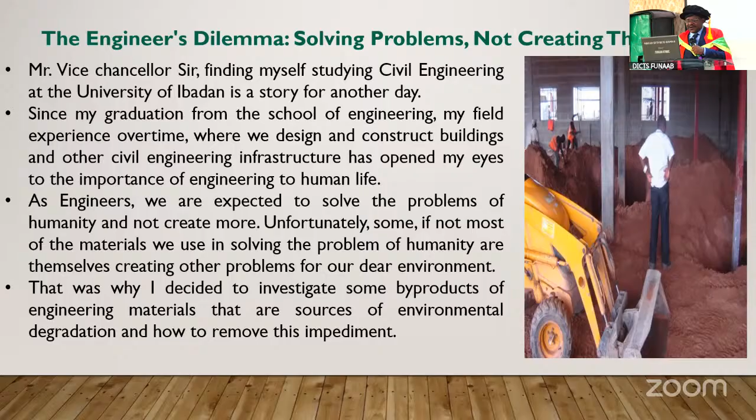Many engineering materials are used in everyday life, such as cement, concrete, crushed stones, gravels, asphalt, steel from iron ore, timbers or woods, hydrocarbon byproducts like plastic, polyethylene terephthalate—the popular PETs—tire rubbers, and many others are daily used in the construction industry. Most of these materials are obtained in their natural state but are later converted for use in engineering infrastructure. The process of conversion or production of these materials has been a source of concern, because some of these production processes have contributed to global warming.

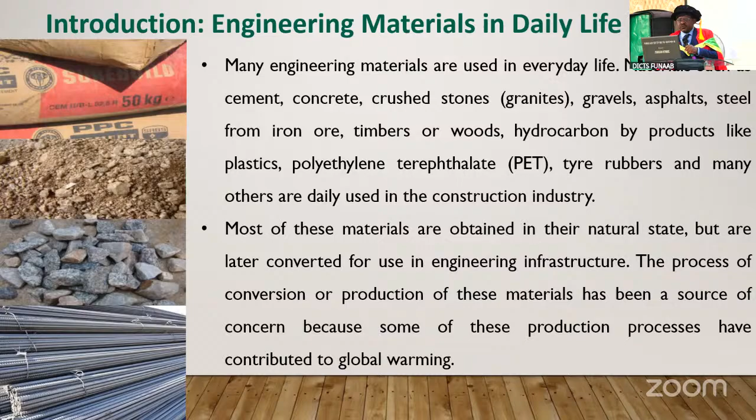The federal government of Nigeria in 2024 started construction of a super coastal highway from Lagos to Calabar, a distance of over 700 kilometers. The interesting aspect of this road project is the use of cement-based reinforced concrete as the pavement for the highway and other infrastructure. The implication of this is that over 70,000 metric tons of concrete will be used for this project.

The concern expressed by experts like Komolafe 2025 on the use of cement-based concrete is its negative impact on the environment. About 33 billion metric tons of concrete are produced annually, according to Uchechukwu 2022, while over 4.4 billion metric tons of cement is produced every year worldwide, according to Shahmansouri 2020. Greenhouse gas emission from cement production, the firing of clinker, accounts for between 5 to 8% of global carbon dioxide emissions, according to Ahmad 2021.

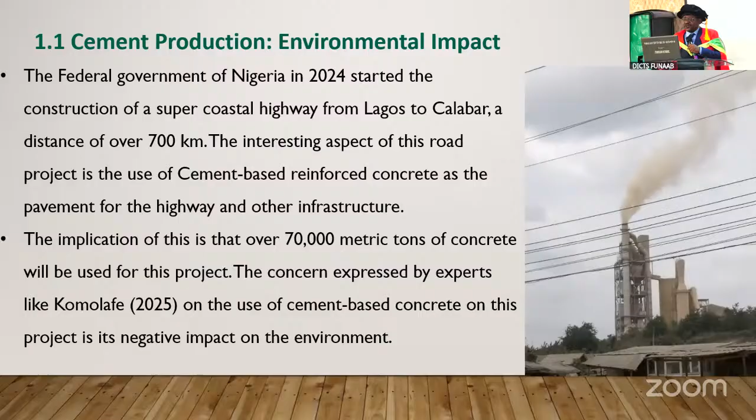In the kiln, clay is fired with limestone at a very high temperature to form a clinker, which is later ground into powder. The limestone equation CaCO3, when fired, gives us calcium oxide, which is used for cement, and carbon dioxide is released to the atmosphere. This has contributed to the depletion of the ozone layer and the current climate change experienced all over the world.

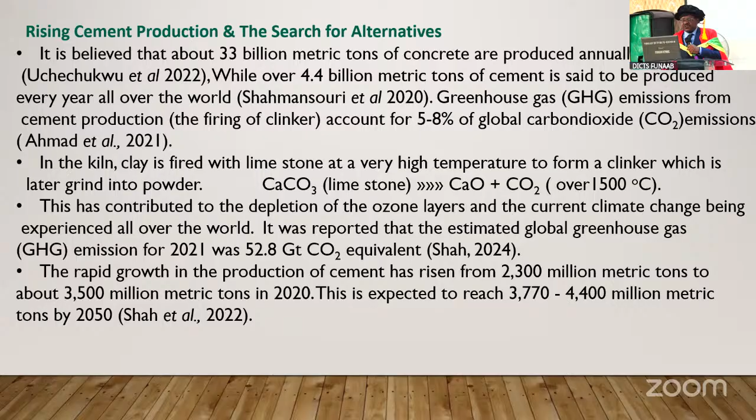It was reported that the estimated global greenhouse gas emission for 2021 was 52.8 gigatons of carbon dioxide equivalent. The rapid growth in cement production has risen from 2,300 million metric tons to about 3,500 million metric tons in 2020. This is expected to reach 3,770 to 4,400 million metric tons by 2050, according to Shah 2022.

What is concrete? Concrete is an amorphous material made of cement, fine aggregates, coarse aggregates, mixed with water. It is the most used engineering material after water. In 6,500 BC, the Assyrians and Babylonians used clay and asphalt as binders because there was no cement.

In 2,500 BC, the Egyptians used lime and gypsum cement for the construction of the pyramids. In AD 1756, John Smeaton created the first modern concrete, the hydraulic cement. In AD 1824, Joseph Aspdin invented the Portland cement that we are using presently. And in AD 1849, Joseph Monier invented reinforced concrete.

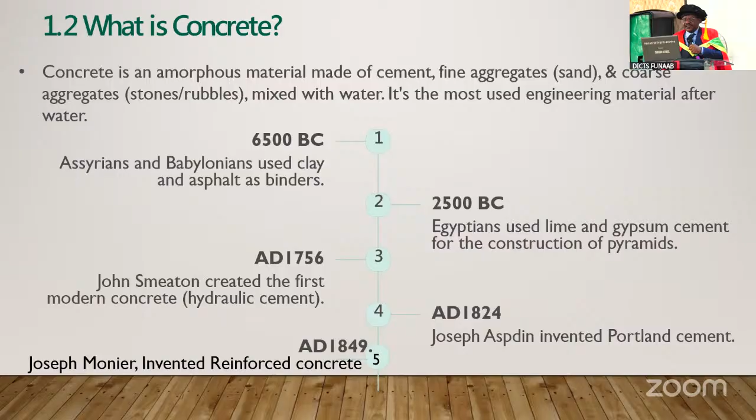Geopolymer concrete technology involves the use of natural materials that contain aluminosilicate, like calcined kaolin or metakaolin, industrial waste such as fly ash, organic minerals, and blast furnace slag. These materials are mixed in an alkaline environment, such as the oxide of sodium or calcium, mixed with sodium or calcium trisilicate in a certain proportion and molarity.

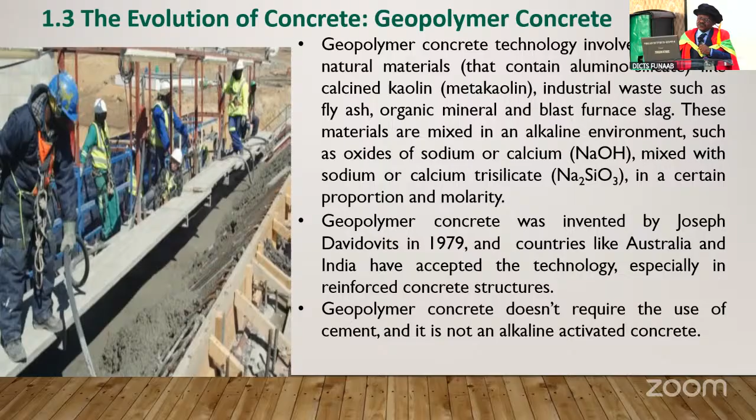Geopolymer concrete was invented by Joseph Davidovits in 1979, and countries like Australia and India have accepted the technology, especially in reinforced concrete. Geopolymer concrete does not require the use of cement, and it is not an alkaline activated concrete. The search for sustainable solutions has led to extensive research into alternative materials for concrete.

We have non-biodegradable materials wasting around, materials like plastic PET, rubber waste, and polyethylene for construction. Also, supplementary materials like metakaolin, ground granulated blast furnace slag, fly ash, corncob ash, etc. are being studied as cement replacement. Implementing the use of these will help us mitigate the depletion of the ozone layer and reduce landfill waste.

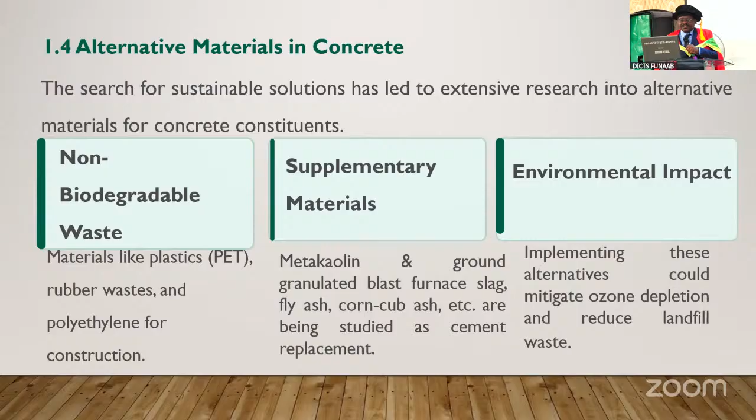My research contribution. Mr. Vice Chancellor, sir, I wish to state that I have done a lot of work on the use of discarded materials in the production of eco-friendly concrete. My exploration of this route was as a result of my observation as an industry-based engineer who later transitioned into the academic field. My research journey began from observing the indiscriminate disposal of non-biodegradable wastes and the environmental impact of cement production. This led to exploring eco-friendly concrete alternatives.

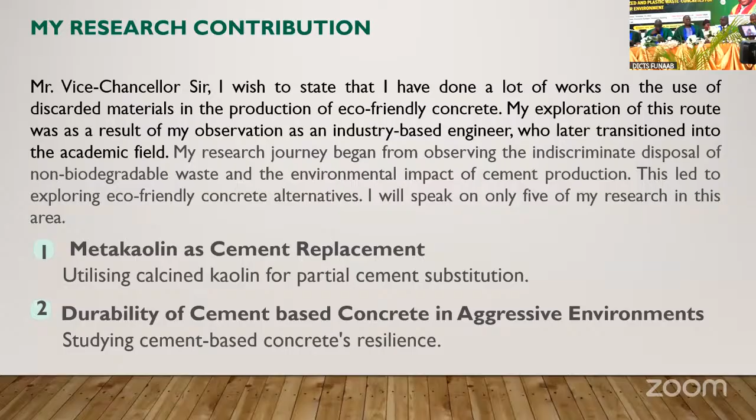I will speak on only 5 of my research works in this area: metakaolin as cement replacement, the durability of cement-based concrete in aggressive environments, geopolymer concrete, rubber crumbs and plastic waste in concrete, and plastic and glass waste in bricks.

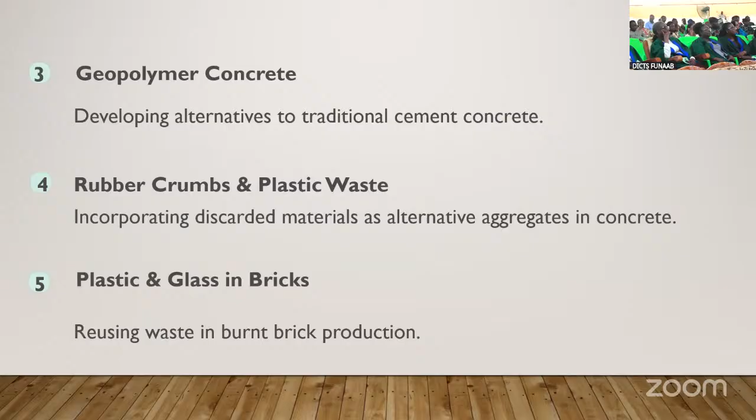For the metakaolin, Akinyele et al. 2017 A and B used calcined kaolin as a partial replacement of cement in concrete. Metakaolin, a highly reactive aluminosilicate pozzolan, offers a promising partial replacement for cement. It combines with slaked lime to form compounds similar to hydrated Portland cement.

Nigeria boasts an estimated 3 billion metric tons of kaolin deposits across various states, presenting a sustainable and expanding market for its application in construction. Kaolin is found in commercial quantities in Nigeria with deposits in Ogun, Edo, Plateau, Nasarawa, Katsina, Ekiti, Kogi, Abia, Kano, Niger, Bauchi, Sokoto, Kaduna, Oyo, Delta, and Borno states.

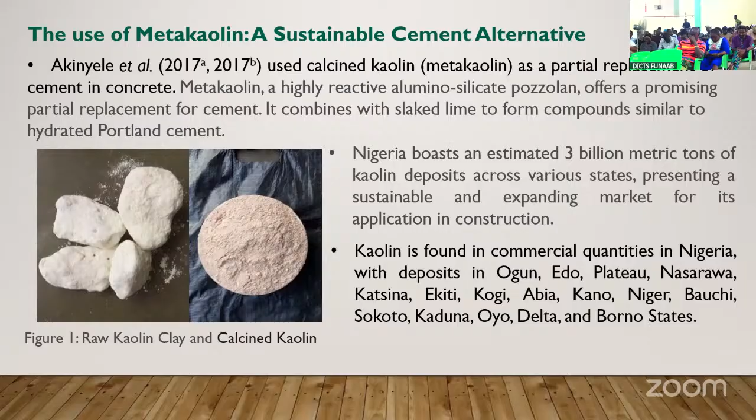The chemical composition of metakaolin, from table 1 above, shows metakaolin having silicon oxide, aluminium oxide, calcium oxide, and ferrous oxide. These are the main components in our cement that make it cementitious. Our research involved calcining kaolin clay to 700 degrees Celsius and replacing cement with metakaolin at various percentages.

The replacement percentages were 0, 5, 10, 15, 20, 25, 30, and 35% at a 0.5 water cement ratio. For a material to be pozzolanic or cementitious, it must contain 70% combination of silicon oxide, aluminium oxide, and ferrous oxide, according to ASTM C618. From the table, we can see that our kaolin and metakaolin met this demand. Our cement also shows this compound: 63.61% calcium oxide, aluminium oxide 5.64%, and silicon oxide 21.55%.

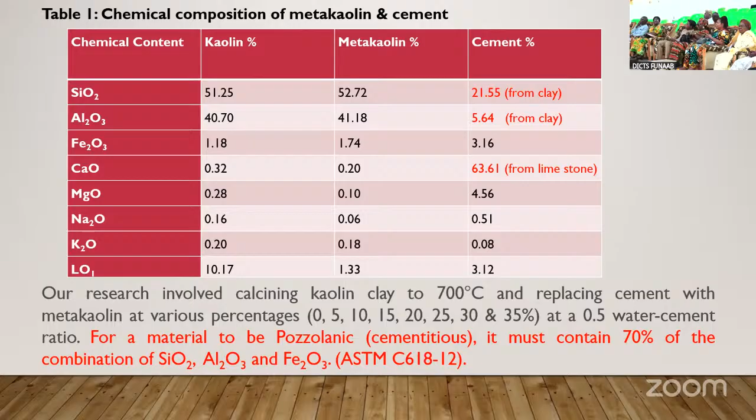The mechanical test, compressive and flexural test, reveal that concrete strength peaked at 20% metakaolin replacement, outperforming the control samples. However, the strength decreased beyond this value. Metakaolin can replace cement at between 20 and 35%.

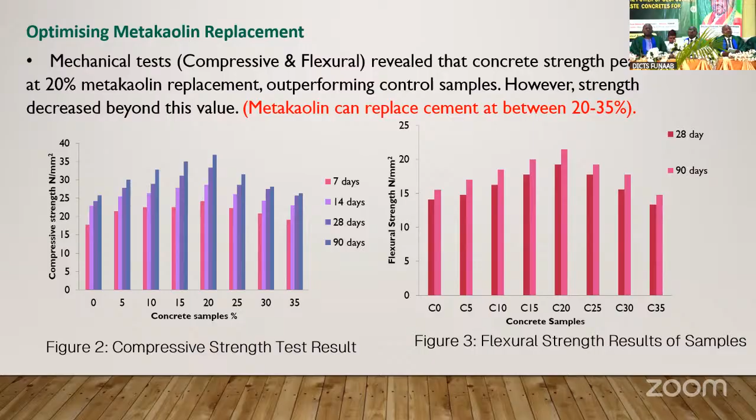Durability challenge of cement-based concrete in aggressive environments. Mr. Vice Chancellor, sir, the effect of sulfate and chloride ions on the rate of deterioration of concrete in marine environment was investigated by Akinyele et al. 2018, 2021, and 2024, and Igba and Akinyele et al. 2019, 2021, and 2022. The ingress of sulfates and chloride salt into reinforced concrete structures has led to the continuous deterioration of bridge structures and some of the concrete jetties on the Lagos Lagoon.

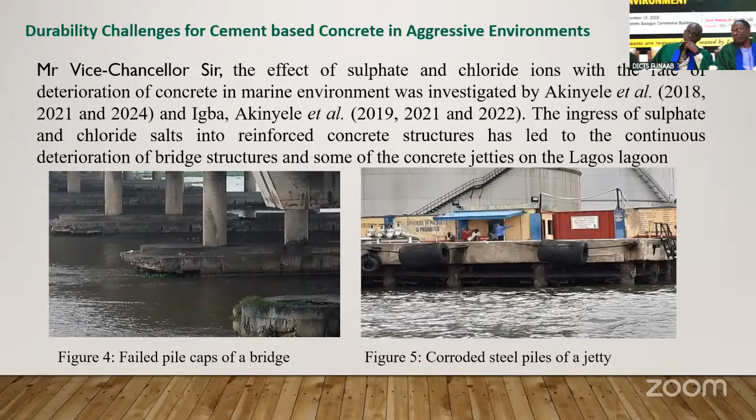Figure 4 shows the failed pile caps of some of the bridges in Lagos. When you go there, you see it. Also, corroded steel piles of some jetties. This is as a result of the effect of chloride and sulfate in the sea water.

To predict the deterioration, this research involves submerging concrete cube and beam samples in lagoon water for a period of 1 year, conducting strength tests, and using ANSYS software to simulate beam reaction to loading. The mathematical model in equation 1 for the prediction of the strength of concrete was used to determine the strength of concrete submerged in lagoon water and fresh water over a period of time. This model equation was developed by ACI 209-92. The results.

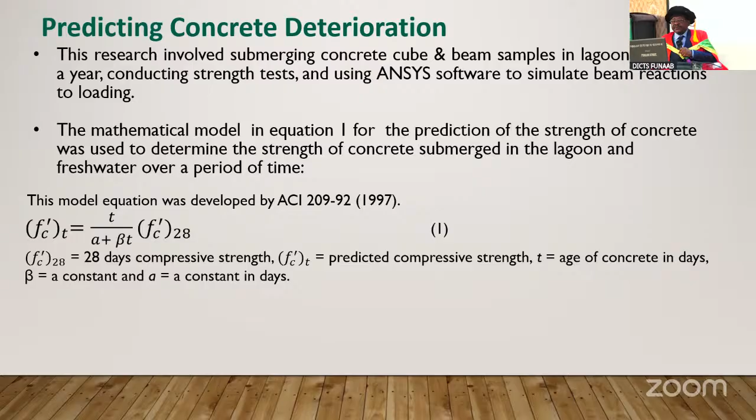The grade 30 and grade 40 concrete samples were cured in lagoon water and fresh water. The ones cured in lagoon water were tagged BL30 and BL40, while the ones cured in fresh water were tagged BF30 and BF40 respectively.

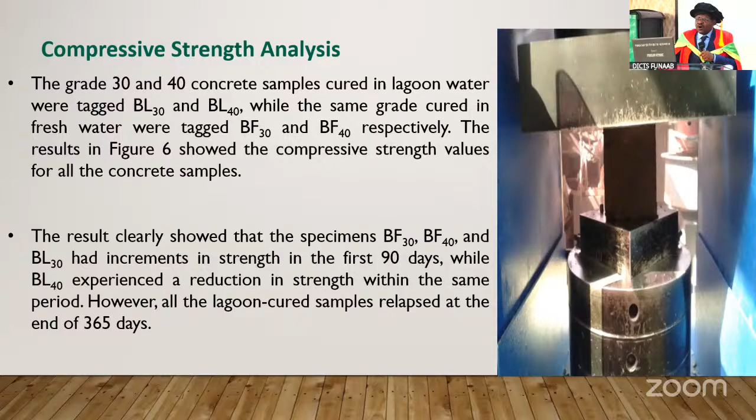Deterioration rate: the compressive strength results revealed that the deterioration rate within 1 year for BL30 was 0.057, while that of BL40 was 0.044. This indicated that the grade 30 concrete cured in the lagoon water showed a sign of higher deterioration when compared to the grade 40 concrete. This is because of the concentration of cement in it.

This result was used to predict the long-term strength of the concrete cured in lagoon water if the deterioration rate remained constant over the years under consideration, using equation 1. We can see some deteriorated samples of the concrete that we cured in the lagoon. You can see how dirty it is, carrying so many organisms on it.

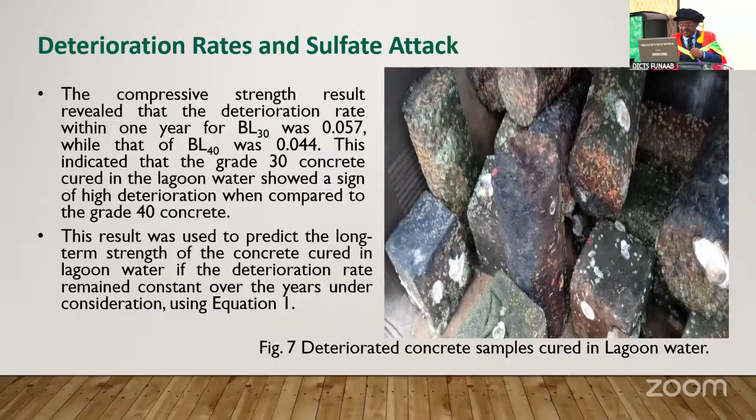Using equation 1, we were able to predict the strength of concrete after 10 years. For the grade 30, the strength reduced to 24.10 MPa, while for the grade 40, it reduced to 31.11 MPa. This prediction highlights the significant strength reduction over time for concrete cured in lagoon water.

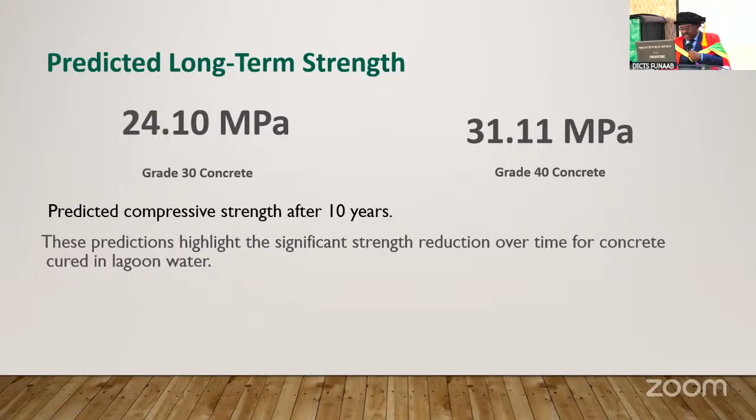We are going to see the reason why now. For the flexural test, BL40 at 90 days had the optimal average flexural strength in all the curing environments. However, this reaction was reversed after the 90th day with a gradual reduction in strength. At this stage, the negative effect of sulfate salt on the concrete and chloride on the steel reinforcement caused a reduction in strength.

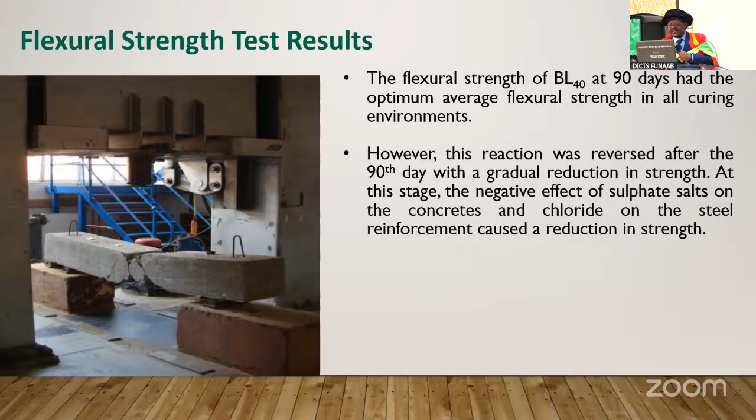Now, we are able to carry out the energy dispersive spectroscopy result in order to know the chemical compound in the concrete. The following elements were detected in the concrete sample cured in lagoon water at the end of 365 days: 11.55% silicon, 35.3% oxygen, 40.2% calcium, 1.2% magnesium, 6.1% ferrous, and 5.5% carbon. There was no trace of sulfur in the concrete sample at the end of 365 days.

This was because the sulfate ion had reacted with the calcium oxide and the calcium aluminate in the cement to form gypsum and ettringite. These two compounds, gypsum and ettringite, are the ones that cause the expansion, cracking, bond and strength losses, with the eventual disintegration of the concrete. We call this spalling.

That figure we saw the other time is as a result of the ettringite and gypsum that was formed.

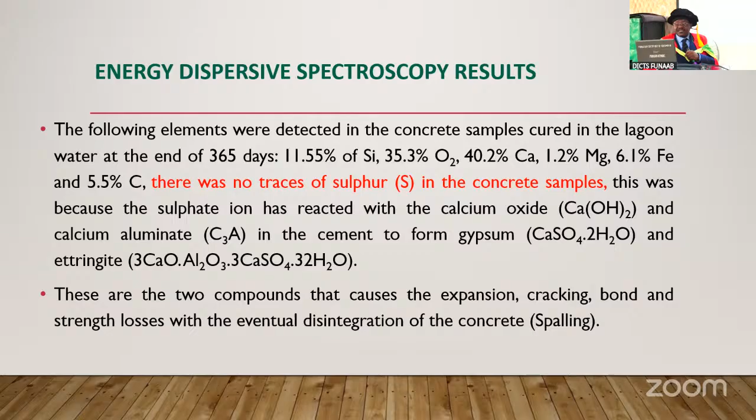Now we look at the bond strength test, which is to determine the bond between the steel rod and the concrete. The results generally showed that BF40 had increased in bond strength between 28 and 365 days, with peak strength at 18.6 MPa. BL40, however, behaved differently.

The bond strength peaked at 90 days with a value of 26.52, but took a downturn to 16.79 at the end of 365 days. The reversal in bond strength can be linked to the negative effect of chloride ingress into the concrete, which attacks the steel reinforcement, allowing corrosion to set in and eventually reducing bond strength.

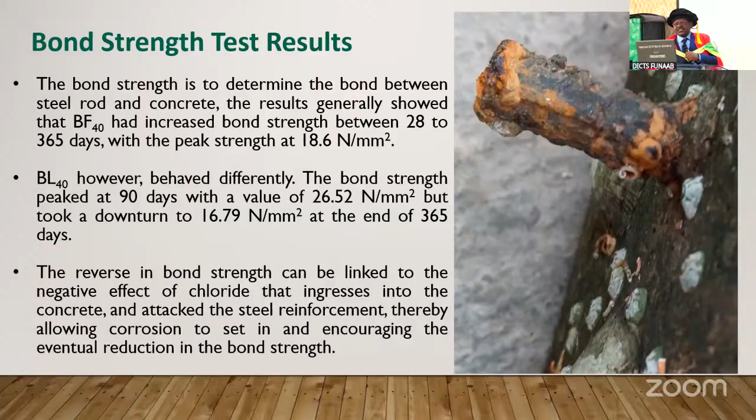Now, for the beam simulation, we try to look at the behavior of the beams under load. Simulation was carried out to determine the effect of chloride ion on the steel rebar deformation under sustained load at 1 month, 1 year, 2 years, 3 years, and 10 years.

The deformation of the bar BL40 at 28 days was 3.78 millimeters, increasing to 3.85 at 1 year, and 7.41 after 10 years. Meanwhile, the BF40 rod deformation was reducing over time, showing it is very good compared with the one cured in lagoon water.

For the deflection in the beam, the deflection decreased from 4.45 mm to 4.13, and from 3.94 to 3.90, for BF30 and BF40 respectively within 1 year, while it increased from 4.7 to 9.8 and from 3.9 to 32.32 from 28 days to 10 years for BL30 and BL40 respectively.

This simply confirms the negative effect of sulfate and chloride ions on the sample cured in the lagoon water. Hence, cement-based concrete resilience is very poor in aggressive environments.

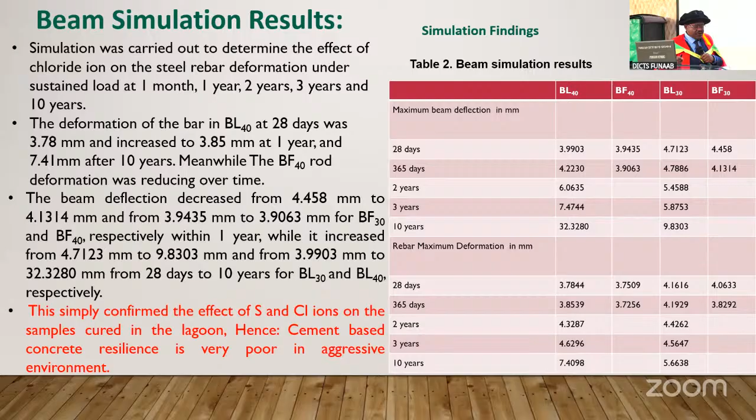Geopolymer concrete: Mr. Vice Chancellor, sir, research has established that the production of cement has contributed about 8% of carbon dioxide emission released to the atmosphere. One of the alternatives to near-zero CO2 production in the concrete industry is the use of geopolymer concrete.

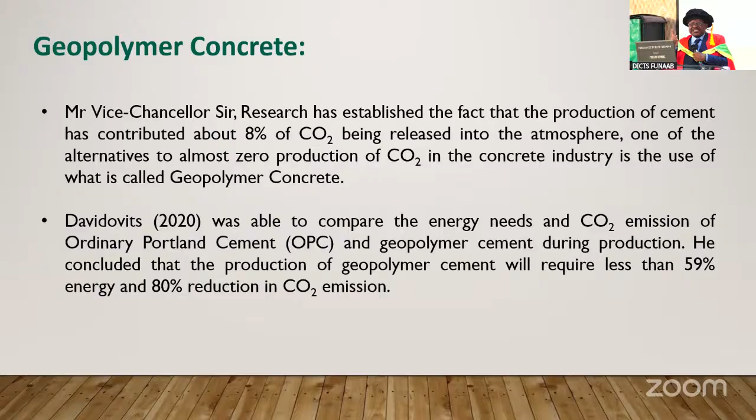Davidovits in 2020 was able to compare the energy needs and carbon dioxide emissions of ordinary Portland cement and geopolymer cement during production. He concluded that the production of geopolymer cement will require 59% less energy and result in an 80% reduction in CO2 emission.

The effect of aggressive environment on geopolymer concrete was investigated by Akinyele and Ewetade 2025, and Akinyele et al. 2025. Samples of geopolymer concrete were cured in lagoon water after 7 days of casting, while the control sample was cured at ambient temperature, designated as GPCW, geopolymer concrete cured in water, and GPCD, geopolymer concrete in dry condition. Reinforced geopolymer beams were subjected to flexural strength tests.

The concrete cubes were subjected to compressive strength tests at 28, 90, 180, 270, and 365 days in the laboratory. Normally, geopolymer concrete is not supposed to be cured in water, because its geopolymerization process will be hindered by water. It is to be oven cured at 60 degrees Celsius or steam cured for quick geopolymerization, unlike ordinary Portland cement concrete, which needs water during its hydration process for curing.

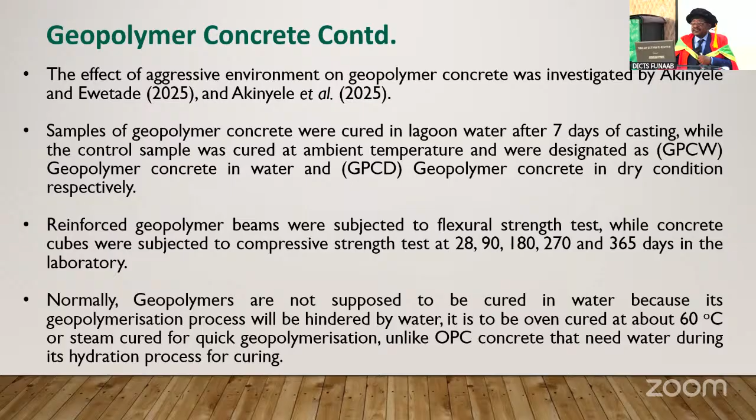We were able to carry out beam simulation also for the geopolymer concrete, and the results in Table 3 show the experimental outcome. For the deflection in both dry and wet cured geopolymer concrete, it was observed that deflection was generally low, below 1 mm.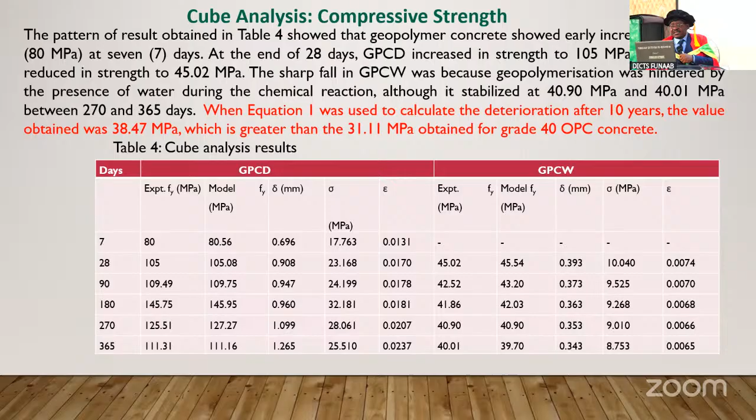When equation 1 was used to calculate the deterioration rate at 10 years, the value obtained was 38.47 MPa, which is greater than the 31.11 MPa obtained for grade 40 of the ordinary Portland cement concrete.

We were able to use the stress-strain curve to predict the modulus of elasticity, and it was discovered that the modulus of elasticity was between 12.087 and 12.085, which falls within the 10.0 to 20 GPa range for cement-based lightweight concrete.

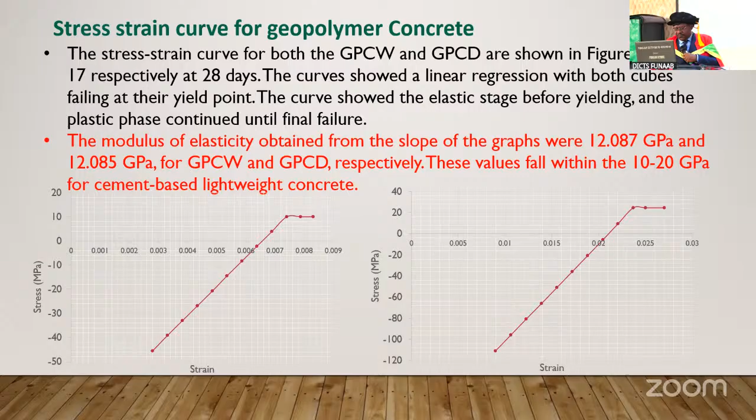Now we look at the elemental composition of geopolymer concrete. From table 5, our interest here is chlorine and sulfate, which is the enemy of concrete. Here, GPCW samples show high chlorine content when compared to the GPCD.

This is due to lagoon water ingress encouraged by the large micropores. But these micropores can be reduced by adequate compaction during casting.

For sulfur, it is consistently low, less than 1%, indicating minimal ion penetration and reduced risk of spalling. The sulfate is unreactive in geopolymer concrete, unlike in normal concrete where we did not find the sulfate because it has reacted. Here it is unreactive, that's why the traces can be found in the sample.

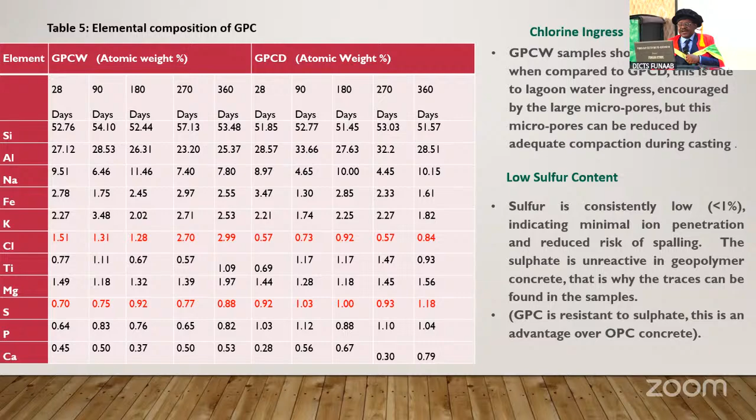GPC is resistant to sulfate. This is an advantage over ordinary Portland cement concrete. This result shows that geopolymer concrete has the advantage of high strength and is more resilient in aggressive environments than OPC concrete.

Rubber crumbs in concrete.

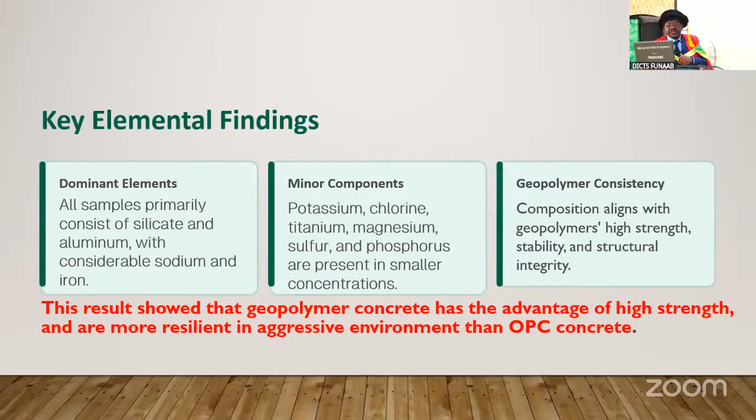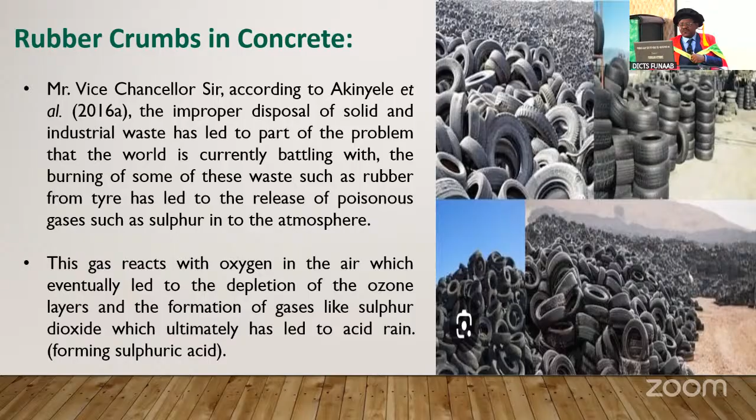Mr. Vice Chancellor, sir, according to Akinyele et al. 2016, the improper disposal of solid and industrial waste has led to part of the problem that the world is currently battling with. The burning of some of these wastes, such as rubber from tire, has led to the release of poisonous gases such as sulfur into the atmosphere. These gases react with oxygen in the air, which eventually leads to depletion of the ozone layer and the formation of gases like sulfur dioxide, which ultimately mix with water during rain to form acid rain, forming sulfuric acid, which is very, very dangerous. Now we try to use that rubber crumb in concrete.

In a study by Akinyele et al. in 2016, rubber crumb was used to partially replace fine aggregate in concrete at 0, 4, 8, 12, and 16%, and was coded as C0, C4, up to C16 respectively. The material was sourced from TOSAS in Wadeville, a recycling plant in South Africa.

This was the work I did during my postdoc in South Africa. This was the research I carried out.

The test analysis: sieve analysis was carried out on the rubber crumb in order to determine the particle distribution, slump test was carried out on the wet concrete, while compressive and tensile strength tests were carried out on the hardened concrete. Microstructure analysis was carried out using SEM, which was used to examine the microstructure of the concrete, and energy dispersive analysis determined the percentage of elements in the concrete.

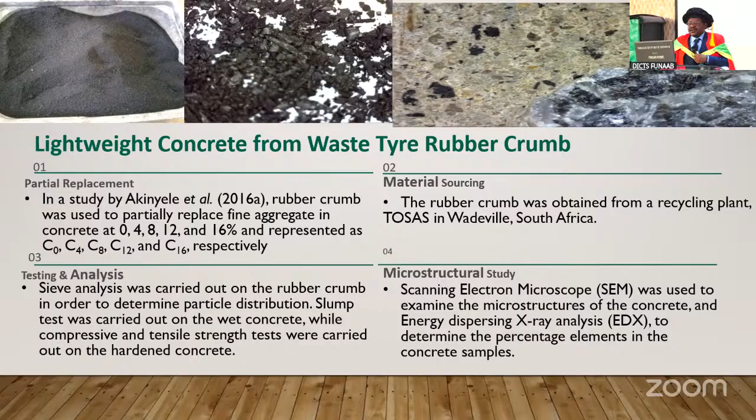The rubber crumb grading analysis. The particle size distribution curve for the recycled rubber crumb has a steep curve, indicating a type of aggregate containing particles of almost the same size.

For the grading requirement, according to ASTM D2487, well-graded aggregate must have a coefficient of uniformity greater than 6, and coefficient of curvature should be between 1 and 3, with less than 5% fines. From our result, the coefficient of uniformity was 4.5, while coefficient of curvature was 2.0. CC is acceptable, but CU is below 6. The recycled rubber particle is a poorly graded material.

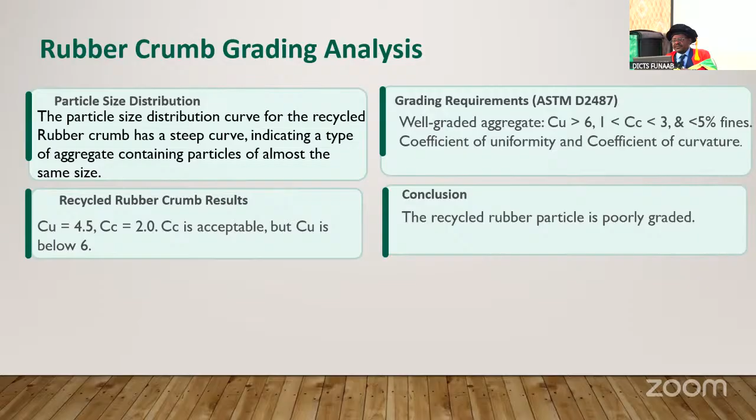For the workability of rubberized concrete, the slump test measures concrete consistency. All the samples showed a true slump, indicating a good consistency.

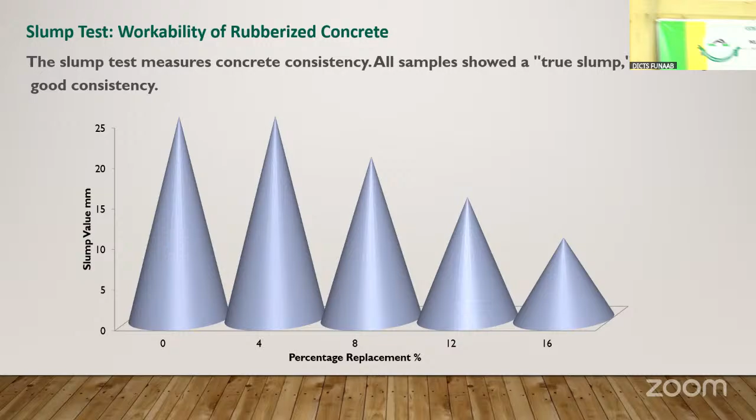Now, the factor that affected the slump: higher rubber content percentage led to lower slump values, between 25 and 10 mm. The dry rubber crumbs have a high affinity for water, absorbing it from the mix, leading to drier concrete. By the time we finished mixing, the concrete became very caked, very hard. That is, we need to add more water to it for it to be good for our work.

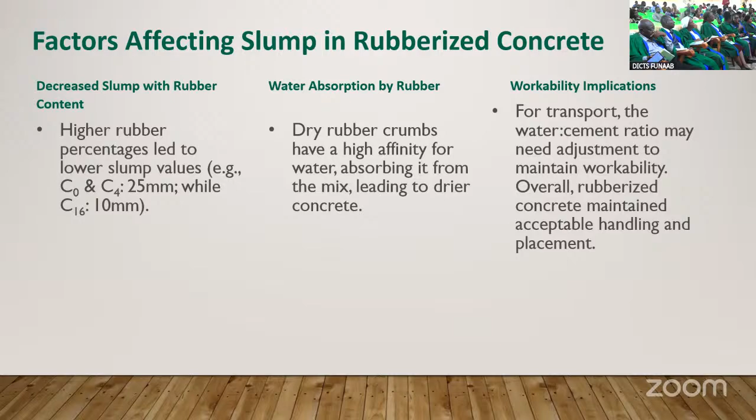So for transportation, the water to cement ratio may need adjustment to maintain workability. Overall, rubberized concrete maintains acceptable handling and placement.

For the compressive strength, it generally decreased as percentage of rubber crumb increased in the concrete mix. The control strength was 23% higher than C4 and 35% higher than C8, while C16 gave the least value, 19.40. The reduction is attributed to decrease in adhesive strength between waste rubber and cement.

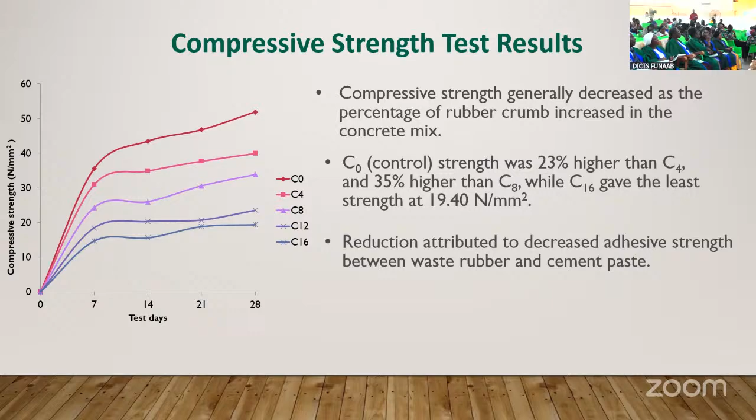You see that the strength was reducing as more rubber crumb is being added to it. Some would think that is an advantage, but wait to see what is happening.

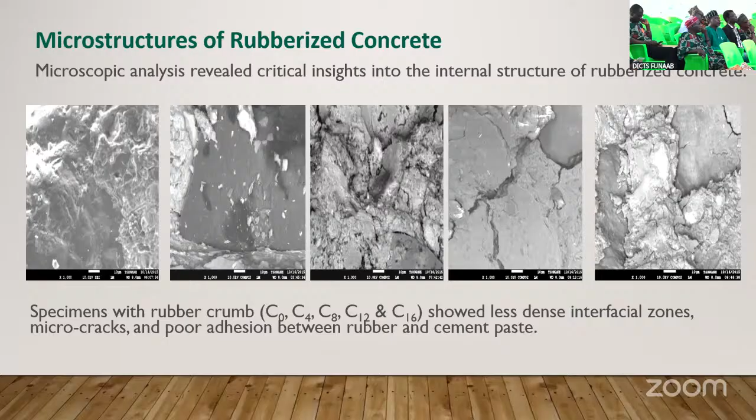The microstructure was studied. Specimens with rubber crumb showed less dense interfacial zones, micro cracks, and poor adhesion between rubber crumb and cement. Now the impact of rubber crumb: poor adhesion, a lot of capillary voids, micro cracks, and so on and so forth.

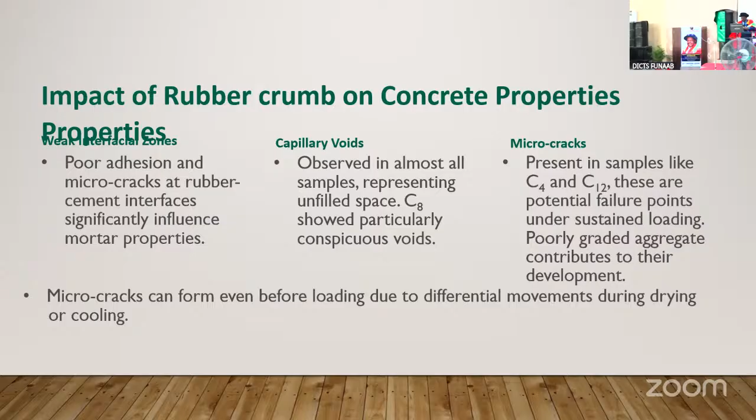Now, the elemental composition: as more rubber crumb was being added to the cement, we have more reduction in the oxygen and magnesium, while we have an increase in carbon and sulfur. The increase in rubber content is primarily from tire rubber carbon black.

This carbon is from the carbon black. The sulfur is from the tire because sulfur is used to strengthen the rubber for our tires, so it was detected by the machine. The rubber crumb induces chemical reaction during hydration, with high sulfur and carbon acting as impurities. These are impurities in the chemical reaction of concrete.

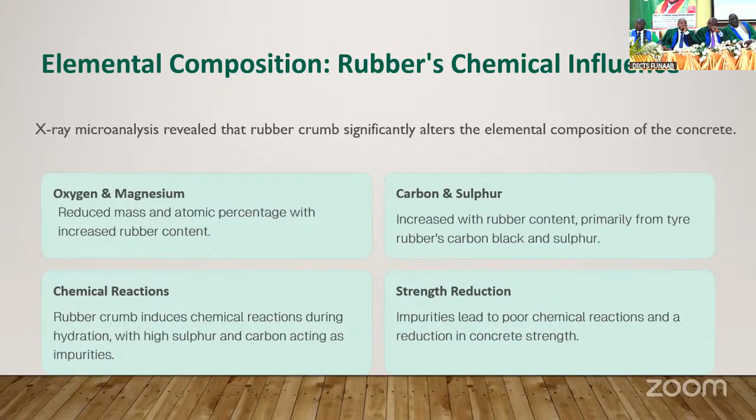Impurities lead to poor chemical reaction and a reduction in strength. We were able to look at the elemental peak, which were between 0.5 and 4 kilo electron volt, showing the dominance of iron, calcium, and oxygen, with traces of the impurities sulfur and carbon in all the samples.

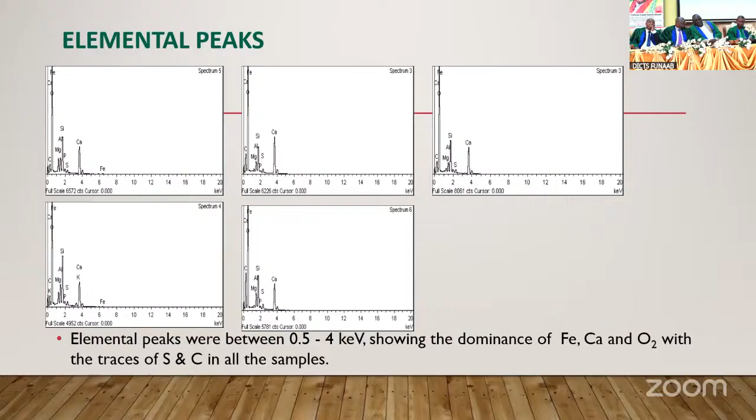Now, application of rubberized concrete. What is the code saying about this? For structural limitation, tire rubber concrete with greater than 8% rubber may be restricted in structural application due to reducing strength. But according to ACI 213, the American Concrete Institute, it's recommended that 7 newtons per mm square should be good for lightweight concrete, and BS 8110, which we use in Nigeria for our design code, requires 15 newtons per mm square for reinforced concrete and 7 newtons per mm square for plain concrete.

From our result, the rubber crumb can replace fine aggregate up to 16% in lightweight concrete, because our C16, which is the least, has 19.40, which exceeded the recommended value. That is the catch, because it's greater than the value the standard said we should use.

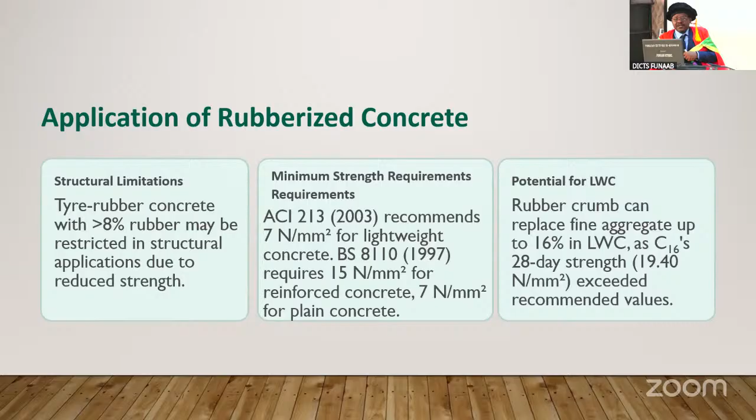Now we look at plastic waste concrete. Mr. Vice Chancellor, sir, the improper disposal of the popular plastic bottles made from polyethylene terephthalate has become a nuisance to our environment. According to Akinyele et al. in 2020 and Harrington 2017, many of this waste generated from PET material has ended up in the water drains and eventually into the ocean.

Some school of thought believe that by 2050 there will be more plastic than fish in the ocean of the world if this trend is not quickly addressed. In fact, sometime ago, I watched a documentary on BBC where some fish were caught, and by the time they caught it, they found plastic particles inside the fish. So already we have started eating plastic from our fishes. We have to be very careful the way we dispose of all this plastic.

Now, what did we do? The granulated plastic waste was used to partially replace fine aggregate in our concrete at 0, 5, 10, 15, and 20%. The concrete formed from it were coded P0, P5, P10, up to P20.

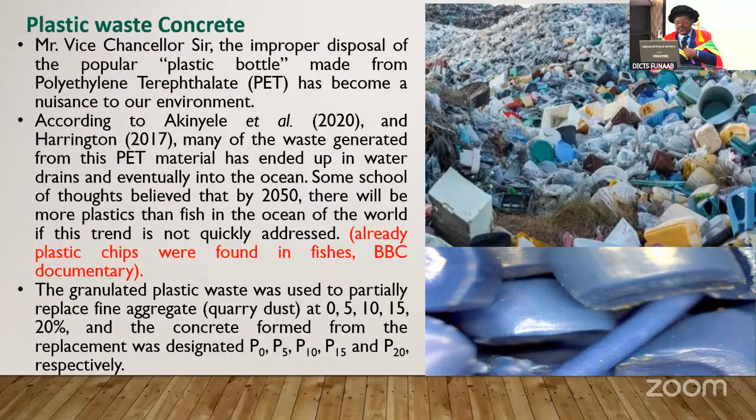Now, for the compressive strength: the compressive strength generally decreased as the percentage of PET increased in the concrete mix. The control sample at 28 days gave us 25.26 newtons per mm square, which was 4.5% higher than the P5 sample. P10 was 14.5% lower than the control. For the P15 PET concentration, the ultimate strength was 20.25, and P20, the highest percentage, gave us 17.1 newtons per mm square, which is the lowest.

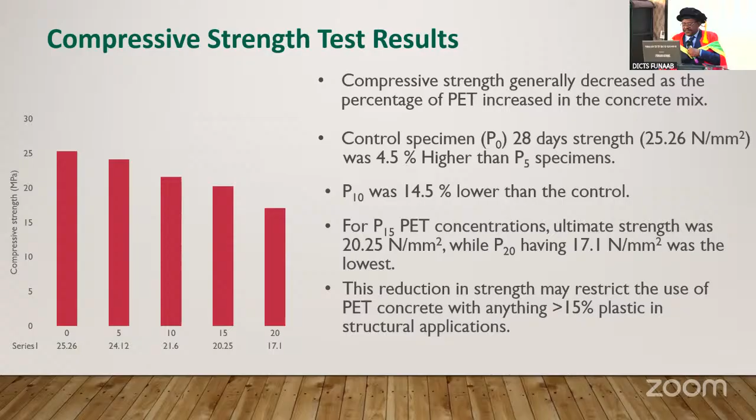This reduction in strength may restrict the use of PET concrete with anything greater than 15% plastic in structural application. Now, what is the code saying? According to ACI 213, as I quoted earlier, 7, 15, and 7. And the least we have here is 17.1, which shows that what we have is greater than the recommendation of the code. That is, we can use this plastic waste, but not greater than 15% in our concrete.

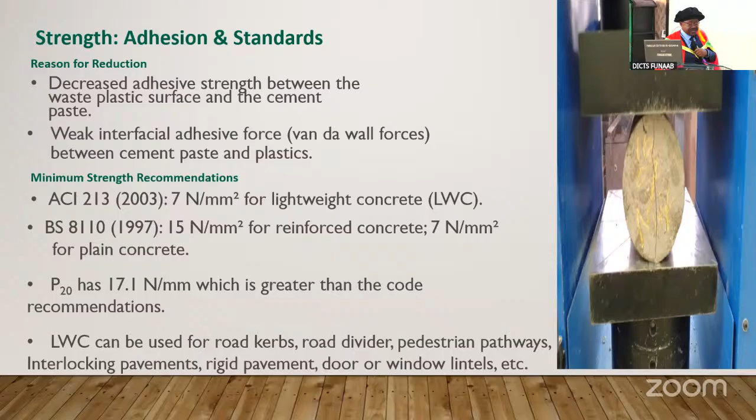So lightweight concrete can be used for road curbs, road dividers, pedestrian pathways, interlocking pavement, rigid pavement, door and window lintels. The windows of your house, the lintel of your window and house, we can use this plastic waste for it when we mix it with concrete at that percentage.

The bending moment was also determined. The bending moment of the concrete beam decreased with every percentage increase in plastic waste.

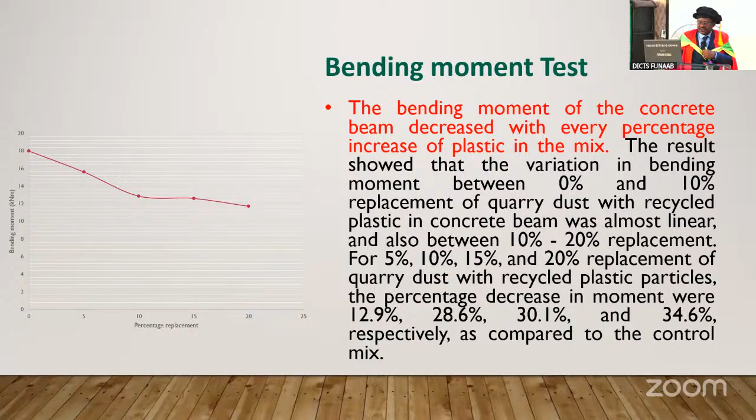Bricks: exploring the innovative use of plastic and glass waste in brick production for enhanced durability and environmental benefits. This particular research won an award from Elsevier Publishing Group in 2022 for meeting the United Nations Sustainable Development Goal, SDG 13.

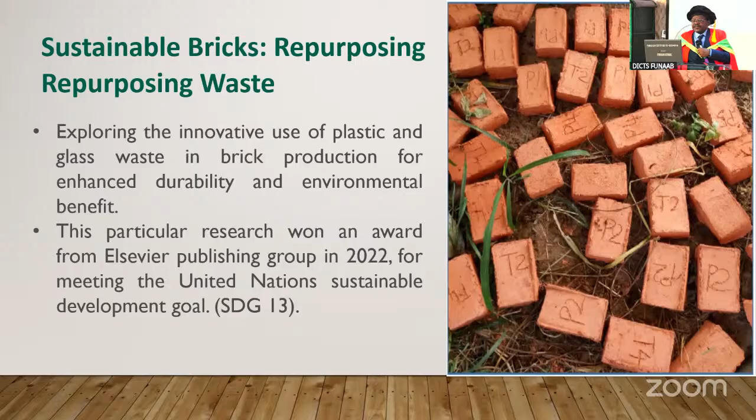Introduction: waste material in brick production. The study investigated the use of crushed glass and polypropylene, that is plastic granules, in two sets of fired clay bricks. These wastes were added to bricks at 1, 2, 3, 4, and 5% proportions, and the bricks were fired to 800 degrees Celsius in an electric operated kiln for about 4 hours. The glass-infused bricks were designated T1, T2, T3, T4, T5, while those with plastic were designated P1, P2, P3, P4, and P5 respectively.

The glass we use is soda lime glass, the common commercial glass. All these windows, all these glasses, they are made from soda lime, so that when it got broken, we can pick it up and use it for our bricks. Polypropylene plastic, of course, is the common plastic often disposed of as waste.

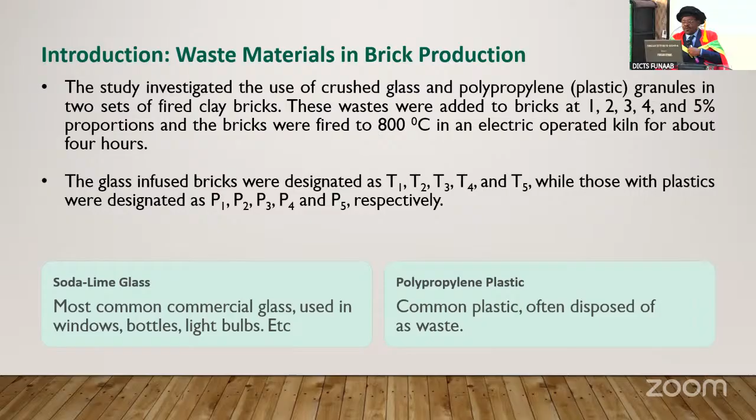There are key performance indicators for our bricks. Number 1, water absorption, which measures durability and internal density. Fire shrinkage indicates dimensional stability and crack prevention. Compressive strength determines material quality and load bearing capacity. Flexural strength assesses bending stress and resistance.

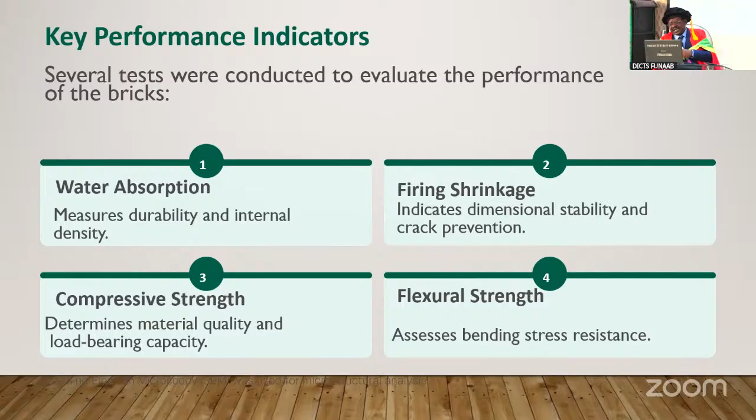When we look at the water absorption of all the samples, water absorption is critical for brick durability. Low absorption indicates a denser internal structure and good resistance to water. All water absorption values are below 20%. These are very good; it shows that in water absorption, all of them perform well.

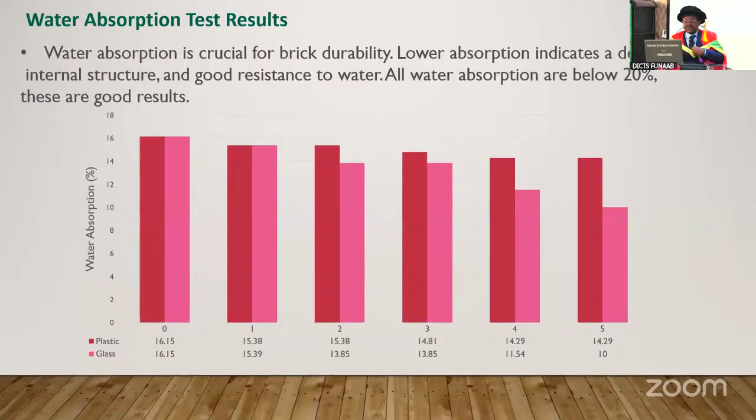For the firing shrinkage, this indicates how much a brick contracts during firing. Excessive shrinkage can lead to cracks. Here, the control sample was the best, while the plastic-infused samples were the worst. Although the general shrinkage values were very small and acceptable, the highest was 2.13%, which is also acceptable, by the way.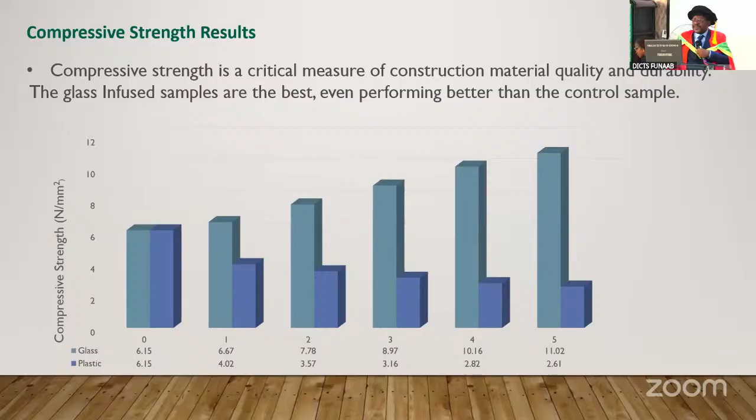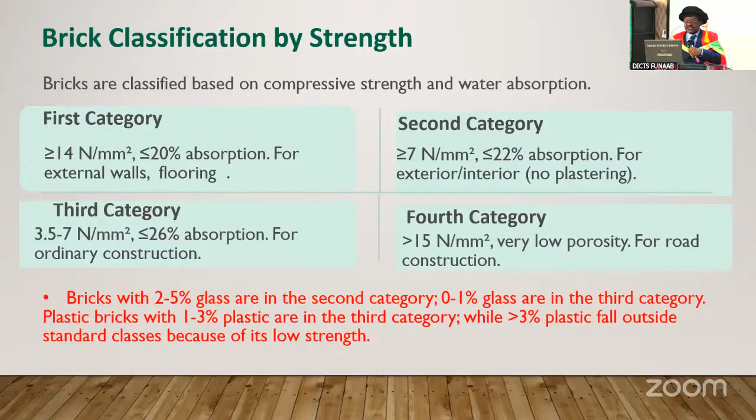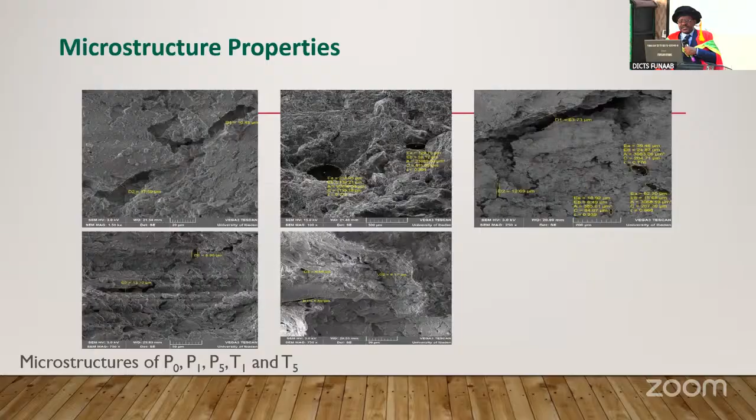Now I want us to look at the microstructure: the impact of plastic waste on brick microstructure. For samples P1 and P5, containing 1% and 5% plastic respectively, large voids were observed in the microstructure. The large void was between 23,689 to 95,756 micrometer square for P5, and between 3,068 to 3,083 micrometer square for P1, with a microcrack width of 63.73 micrometer. These large pores and cracks are attributed to the melted plastic; when the plastic melted, it created that void, contributing to low performance and potential weak points.

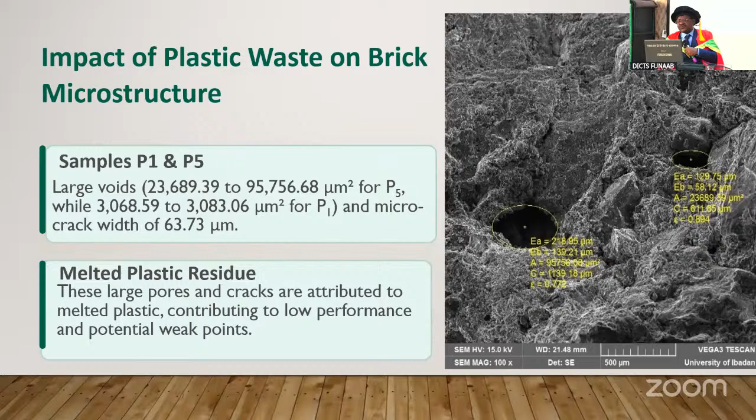Now, for the glass-infused bricks, for T1 and T5, significantly smaller microcracks were observed, between 8.96 to 13.70 micrometer for T1 and between 5.89 to 8.17 micrometer for T5. Sample T5 showed the smallest cracks and the highest structural efficiency of 8.01, 180% greater than the control.

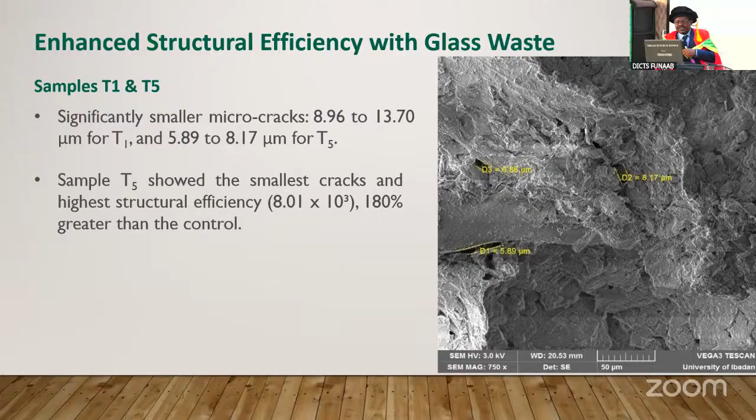This study demonstrates the potential of using plastic and glass waste in bricks. For glass waste, this can be used in burnt bricks at up to 5% replacement, enhancing compressive and flexural strength while reducing water absorption. For plastic, it is suitable for burnt bricks provided the percentage does not exceed 3%, maintaining acceptable strength and shrinkage properties. These findings support sustainable construction practice by repurposing waste material into valuable building components.

I have also worked on the conversion of plastic waste and glass fibers to reinforcement rod, using plant fibers as stabilizer for the rod, the iron rod we use in concrete. We have worked on it using all this waste also. That is another research: from waste to strengths.

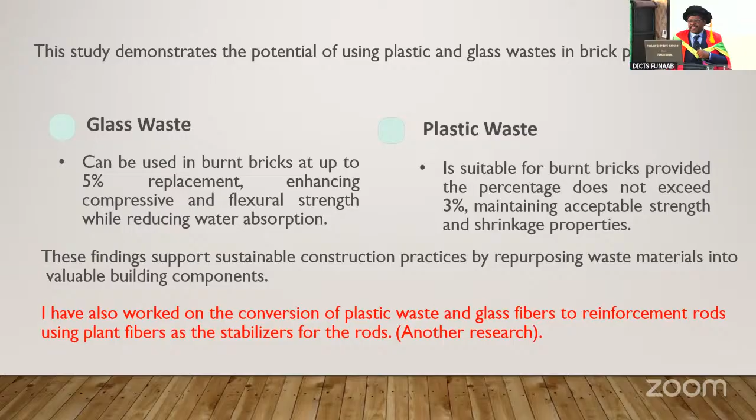Mr. Vice Chancellor, sir, through my research over the years and this presentation, I have explored the use of innovative materials formerly referred to as waste, for a greener future in the construction industry.

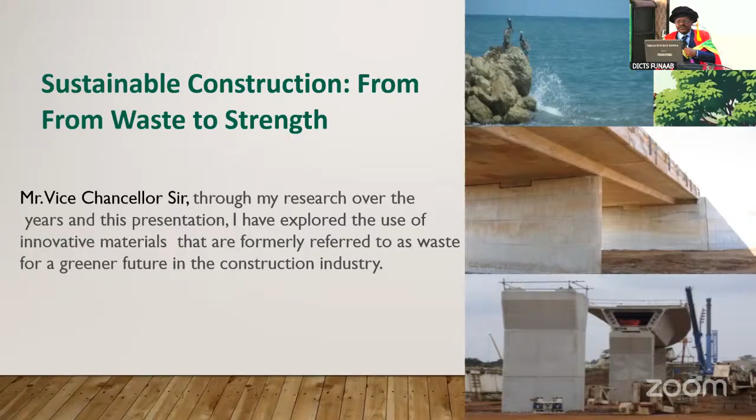Contribution to human development: my academic journey has focused on human development through teaching, student supervision, and engineering design services. I have taught courses like structural analysis, structural design, hydraulics design, finite element method, theory of plate and shell, numerical method, advanced structural mechanics, and many more at the undergraduate and postgraduate levels. By the mercy of God, I have successfully supervised 5 doctoral candidates, over 20 master's dissertations, and about 70 undergraduate projects. Most of my former students are doing fine in the industry and in academics.

As acting head of department, between 2016 and 2018, with the support of my colleagues, I was able to establish a design studio for the department, which is currently used for computer-aided design by our students. I was PG coordinator, exam officer, led the design team for the College of Engineering building complex behind us, served in the University Project Monitoring Committee, Student Design Committee, and various other university committees.

Conclusion. I've looked at creating a safe environment through recycling of waste material to combat greenhouse gases and ozone depletion. My exploration of alternative eco-friendly materials in the production of cement has revealed that calcined kaolin, or metakaolin when fired, and geopolymer concrete are good substitutes to Portland cement. Waste materials like used tire rubber, polyethylene terephthalate, and waste glass can partially replace sand, granite, gravel, and clays in the production of concrete and burnt clay in the construction industry. The conversion of this waste material into use in concrete did not seriously have negative effects on the structural properties, especially the strength of the concrete, from my research.

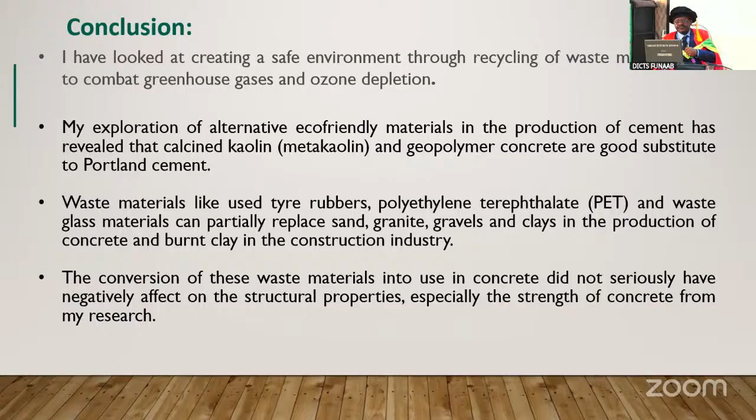This research effort aligns with SDG 13, climate action, by reducing greenhouse gas emissions, promoting adaptation, and increasing climate change awareness. Recommendation for metakaolin in concrete.

I hereby recommend the partial use of metakaolin in place of cement in concrete, but the proportion of metakaolin replacement should not exceed 20% by weight. Although we can go up to 35%, for safety purposes we should limit it to 20% by weight.

For geopolymer concrete, I'm recommending its utilization because of its high compressive strength, resistance to sulfate and chloride, and its eco-friendly properties.

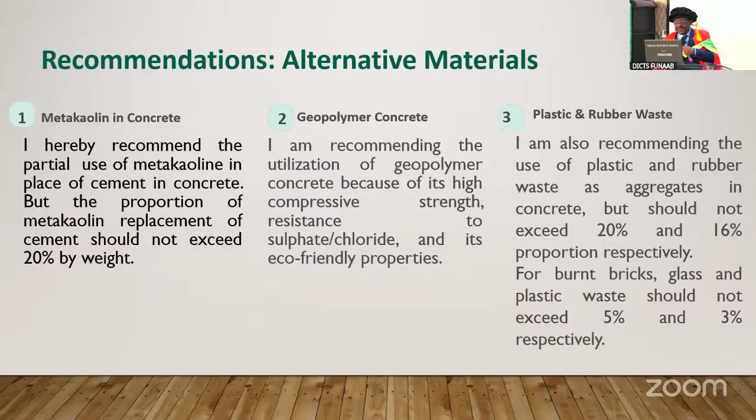For plastic waste, I am also recommending the use of plastic and rubber waste as aggregate in concrete, but should not exceed 20% and 16% proportion respectively. For burnt bricks, glass and plastic waste should not exceed 5% and 3% respectively.

Part of my recommendation: there is a need for increased funding and facilities for research into alternative cement material and waste reuse in construction. Mr. Vice Chancellor, sir, we urgently need a world-class central workshop for the College of Engineering.

What we have currently is supposed to be a temporary arrangement. Sir, for us to be able to carry out world-class research and even to generate IGR, we need a central workshop in the College of Engineering. And I know, sir, you are going to heed our call. Thank you, sir.

Recommendation: I recommend a strong collaboration between cement producers and research institutions in adopting pozzolanic material. There is a need for the enactment of legislation for the appropriate recycling of non-biodegradable waste for concrete production.

Acknowledgement. Mr. Vice Chancellor, sir, this presentation is a heartfelt expression of thanks to the many individuals and institutions who have shaped my life and career. It is a testament to the power of faith, family, mentorship, and community.

I want to thank my Lord, my God, and the Savior of my soul, Jesus Christ, the immortal, invisible, and the only wise God, the author and finisher of my faith, who has preserved my life up to this moment. In the course of my journey of life, I have traveled and passed through the shadow of death, but God has kept me alive to see this wonderful day. To him be all the glory, honor, and adoration. This journey has been marked by divine preservation and guidance, for which eternal gratitude is offered.